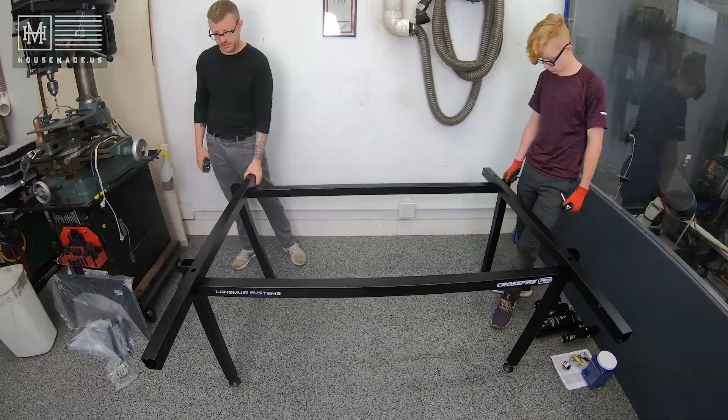Today is the day. We have spent the last couple of days assembling and figuring out all the wiring and everything for the Langmuir Systems Crossfire Pro. My son Dexter just so happens to be kind of an expert in the whole X, Y, and Z axes thing. He's built numerous 3D printers in his very short life. He is 14 years old.

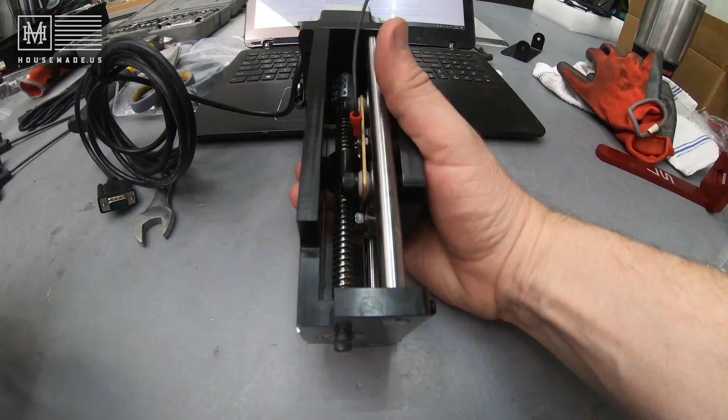And this table is essentially a very large version of a 3D printer. So to have his assistance was pretty awesome, and he knew what he was doing. I kind of went along for the ride and assisted in just double checking everything. So if that gives you any frame of reference, a 14-year-old can, in fact, build a Langmuir Systems Crossfire Pro, which I think is actually kind of cool, right?

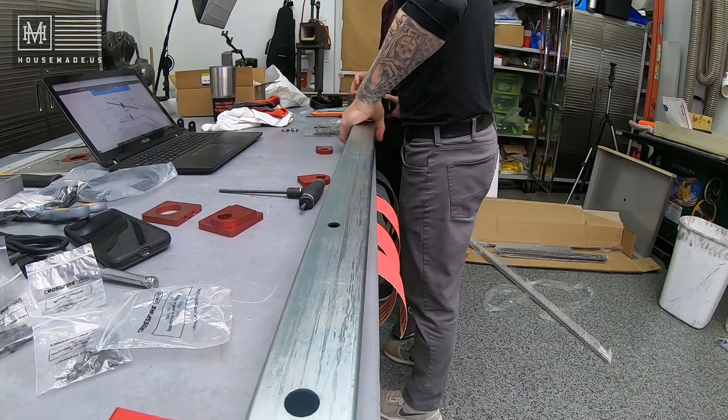Come on up. Did you find that the process was similar to a 3D printer, and did you think it was difficult? I didn't think it was that difficult, and it is very similar to 3D printers, but it's obviously different because it takes away rather than putting it down. But the concepts are the same.

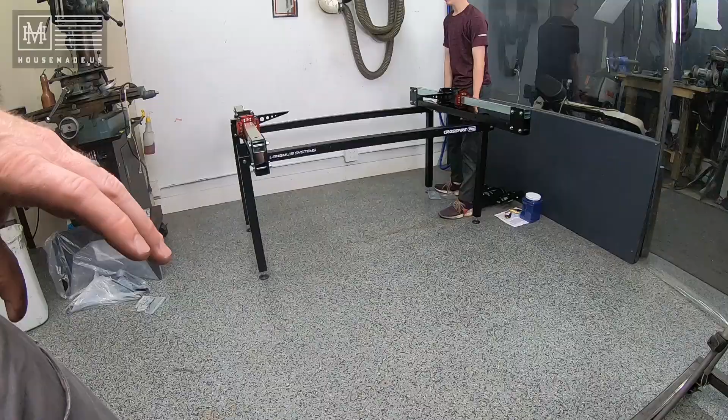With 3D printers, it's usually the bed that moves instead of the whole y-axis. And then the head usually moves the same way as this does, and everything's basically the same. There's obviously some differences between the two.

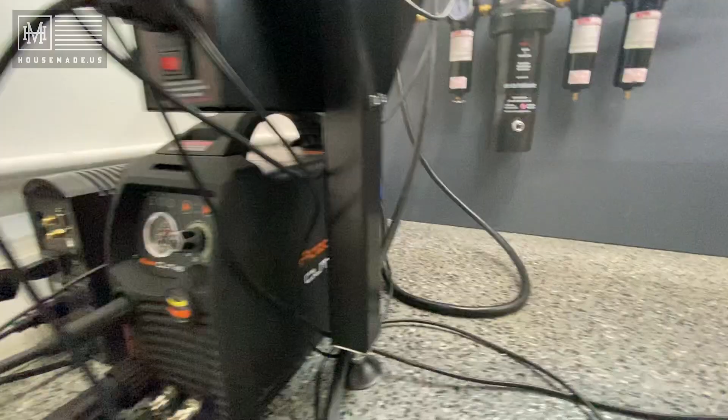Cool. We actually spent all day yesterday getting the plasma cutter plumbed up. There's a couple of core pieces that need to be installed along with the Crossfire Pro and the Razorweld 45, which is the recommended plasma torch setup for this table, although I have seen people use Hypertherm and all different kinds of torches with this setup. We just went with the Razorweld version because that's what Langmuir actually recommends.

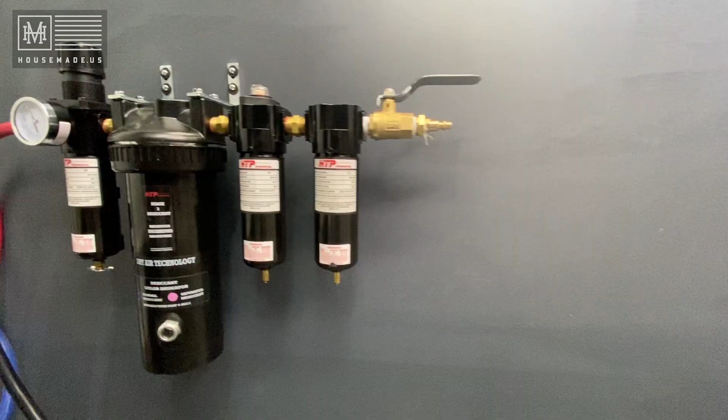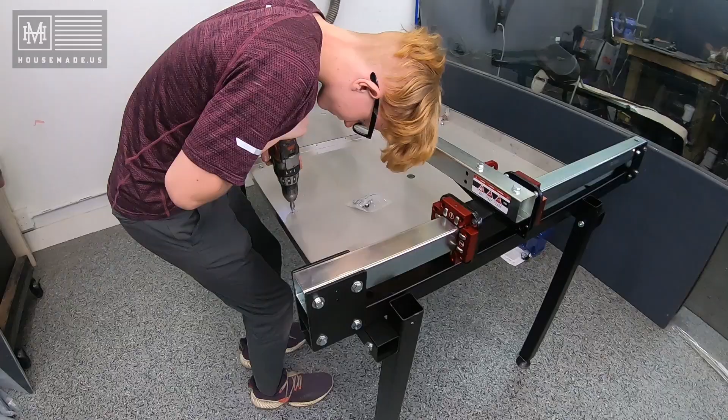So we plumbed it up, and then we plumbed in an inline dryer that went after my dryer that's on the compressor itself. So there's an additional layer of dry air coming into the machine, which many people have told me is super important. If you want good clean cuts, you got to have good dry air. So we spent a little extra money and got the nice air dryer system for it.

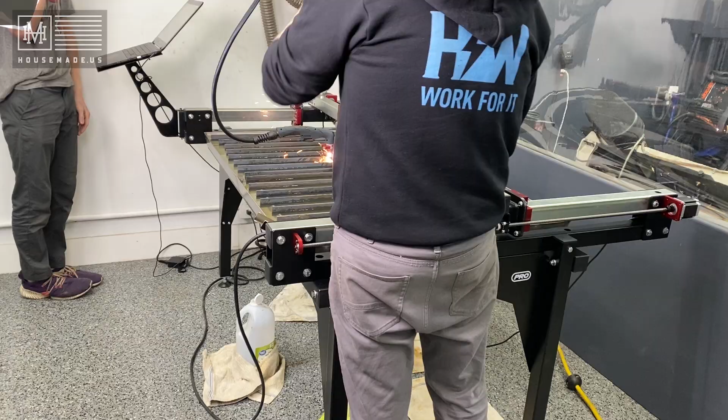So yesterday we plumbed the whole thing, got it all put together and ran our first test cut. It was an exciting test cut because it was something I had been working on in the previous video, which was the platen bracket. I had never put together G-code before, so this was a whole new experience for me. Fusion 360 is awesome, by the way.

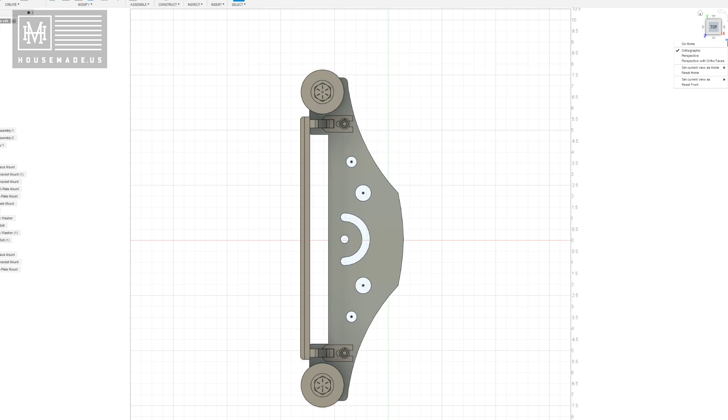It has a whole manufacture component that allows you to draw tool paths and then export it into G-code, which the Crossfire can read through a piece of software called Fire Control. There are all kinds of tutorial videos on the Langmuir Systems website that walk you through this process. Once you understand the core concepts, it becomes relatively simple to set up a path so that it can cut something out.

Then, of course, you've got air pressure and amperage and inches per minute and all these other things you have to factor in. And there's a chart that puts all that together for you, because it's all different based on the thickness of steel you're cutting, or even the type of steel.

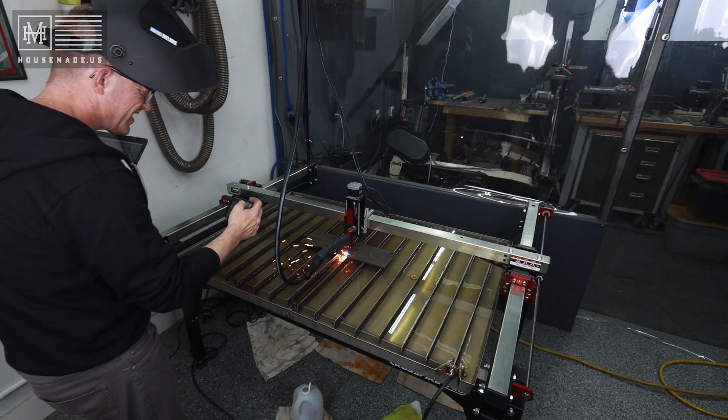So yesterday was our experimental phase. We ran one cut, and I feel like it went really well. It was a good cut, but there were some issues. We didn't have enough air pressure, so there was a lot of slag and dross on the backside, and the pieces didn't fully come away from the cut. We think we have that fixed now, but we haven't run this new set of code yet, so we won't know until we run it.

But I figured, let's bring you guys along for the process so you can actually see it. And I'm not going to edit anything out, so if the cut fails, you'll see that too. So, are you ready to do this? You want to try to cut it? Yeah. You got the machine zeroed out? Yeah. So it's ready, right? Yeah. So take me through the process.

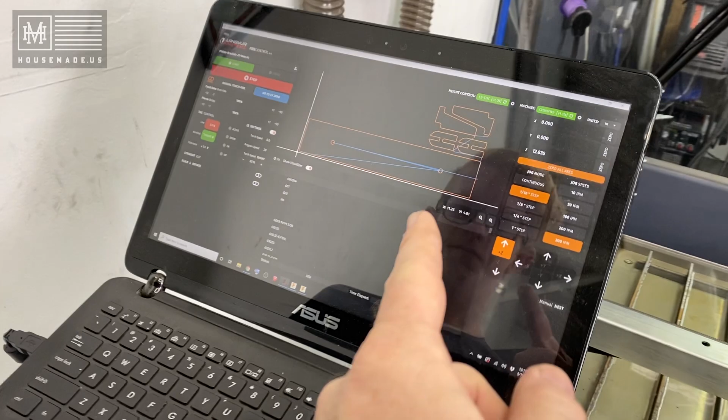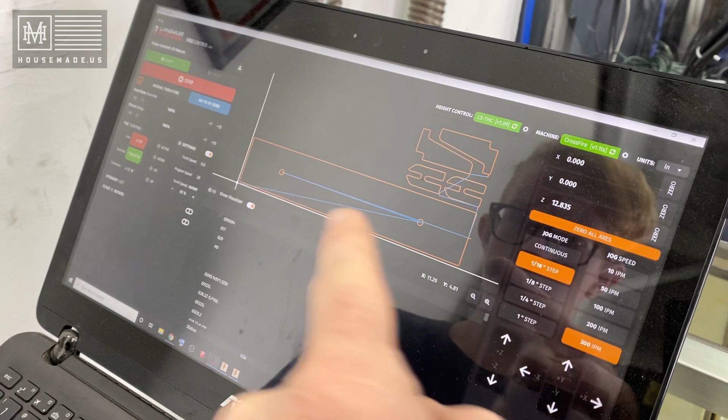Now we've got the G-code pumped into Fire Control, right? Yeah. And these are the tool paths we're looking at here? Yeah, these red or orange lines are where the torch is going to go. And the blue line is where it's not going to cut, right? So that's where it's just traveling across to get to where it needs to go. Yeah.

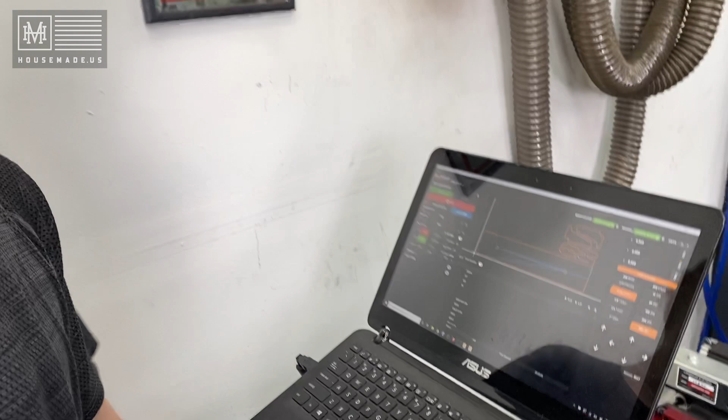Okay, and we've got everything zeroed out. Looks like Z is not zeroed. There you go. Is it all the way up? Mm-hmm. Okay, good deal. So, all right, I guess this is it. We hit start and it'll start cutting. You feel confident? You got all your settings correct? Hopefully. Check your amperage. Check your air pressure.

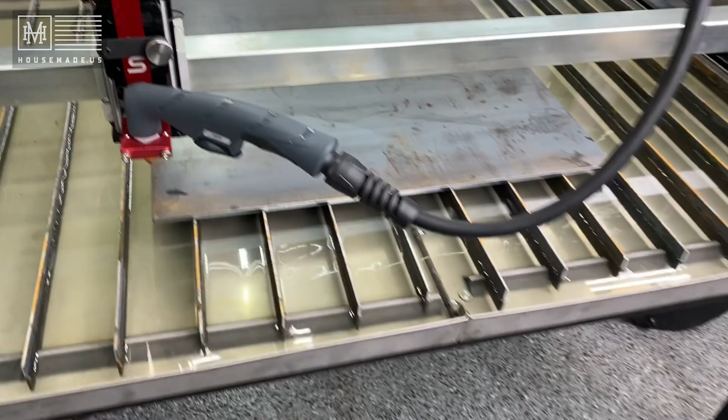We're at about 55 PSI and we're at 30 amps. And it looks like we're all set there. The water table is leak free today. We had to drain it yesterday because we had a small leak. So, all right, let's do it.

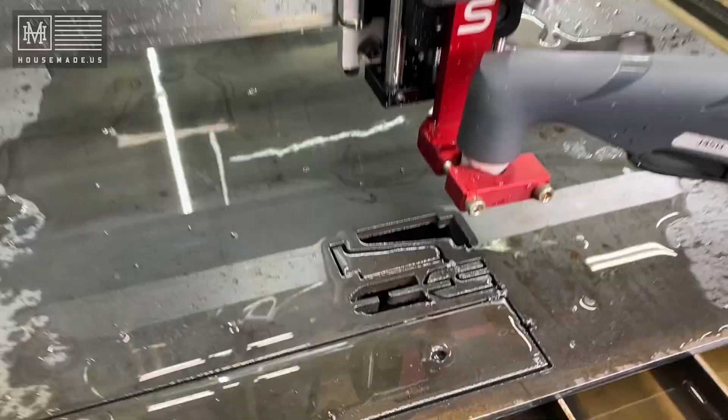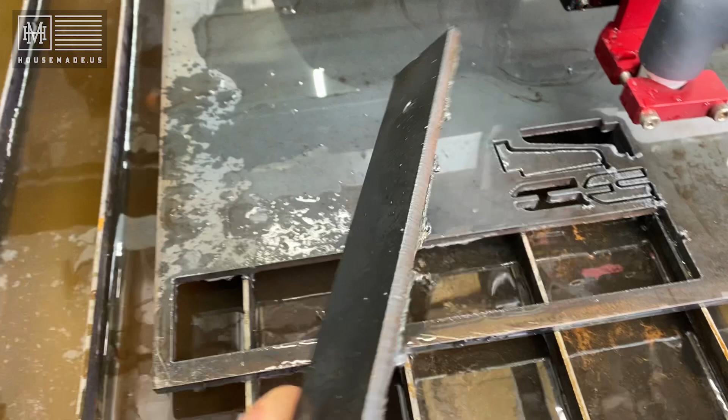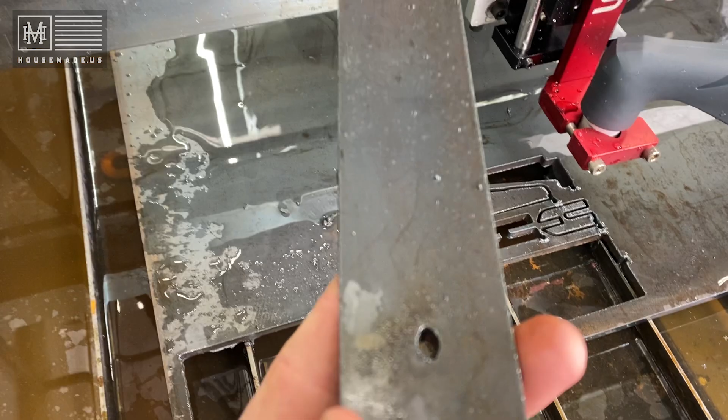Little bit of slag on the back end. It's a lot better though. A lot better. This one piece is all kind of crooked in there a little bit. This one looked like it cut okay. Yeah. Not too bad though. These are really small holes too. So this is a pretty small part.

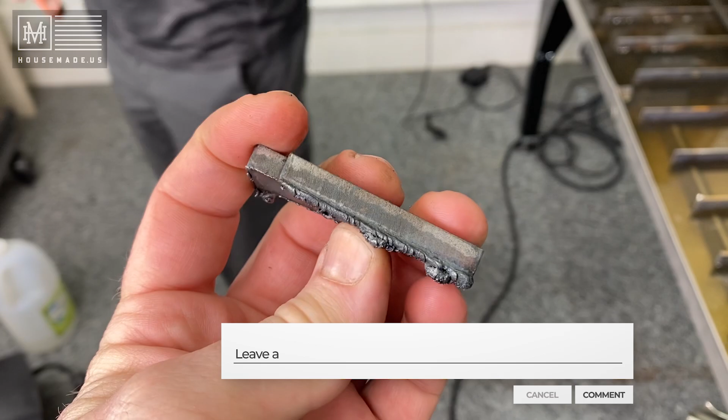The cuts are pretty clean, but it's leaving a little bit of slag or dross. I'm not exactly sure what you call that on the backside there, so we need to figure out why that's occurring. Most of it seems to chip right off. It just kind of comes off in a chunk, but this one would be, that's trouble. We need to fix that.

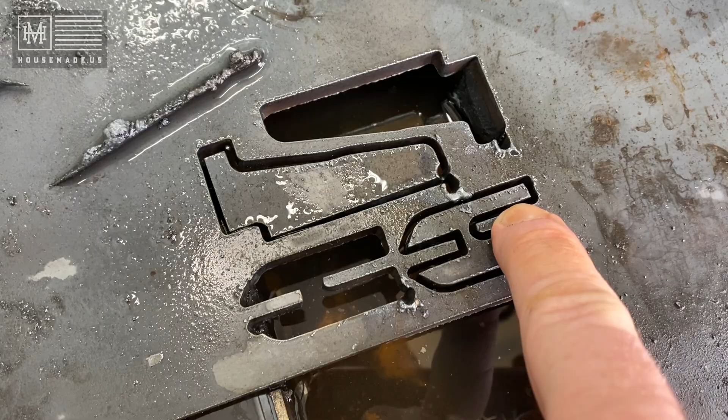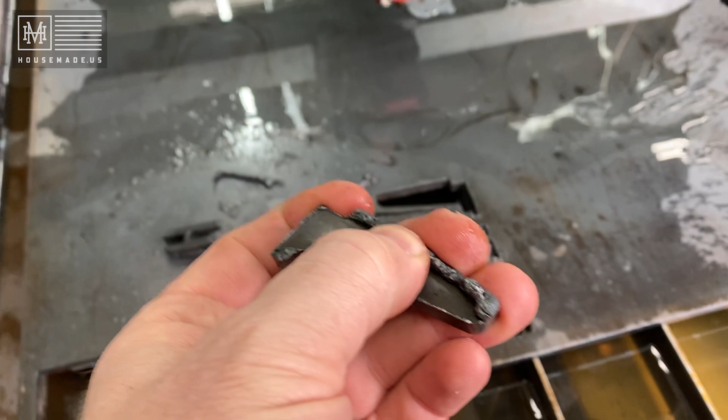And then this little guy here, it's kind of hard to see, but it's off. This side, it looks like it compensated just a little too much on the one side. It's supposed to be the same width, and that could be part of my cutting issue there. And then another slight imperfection here. We kind of have to play around with it a little bit to see what's happening there, but overall not too bad. I'm gonna clean these up and see if they fit together.

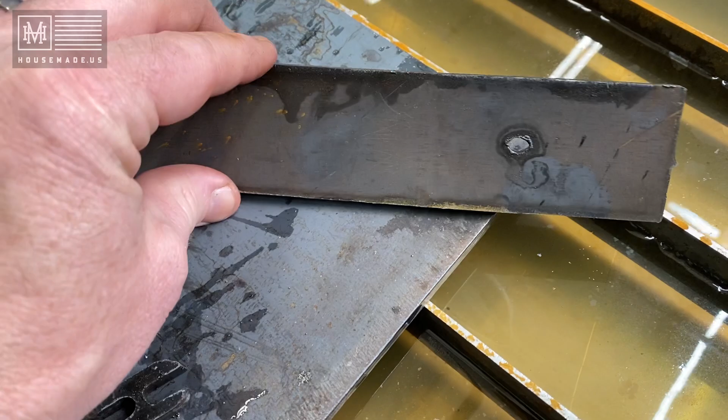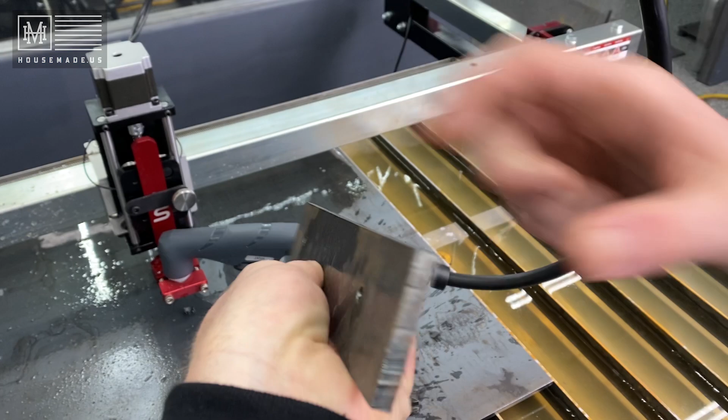Okay, so I tapped it with a hammer, and this actually is what it looks like after I just broke that off with a hammer, and that's actually pretty acceptable in my opinion. I gotta read up on why. Did you break it all off of that piece? Yeah. Oh yeah. So we need to figure out why the cuts aren't square. I mean, they look pretty straight, right? Not terrible. Maybe you'll have to drill out these holes, but yeah, those holes are really small. They're 0.3. Not too terrible.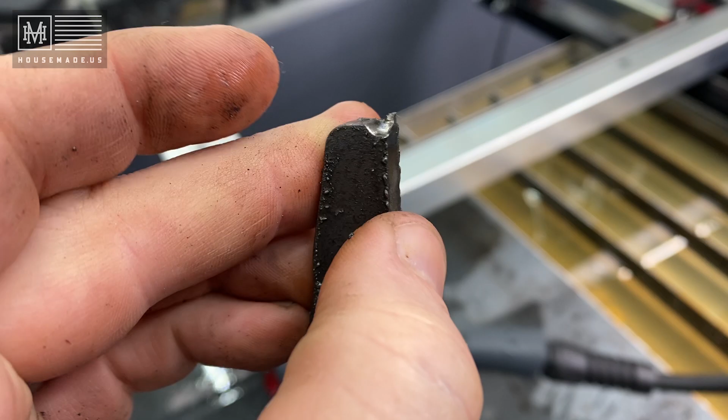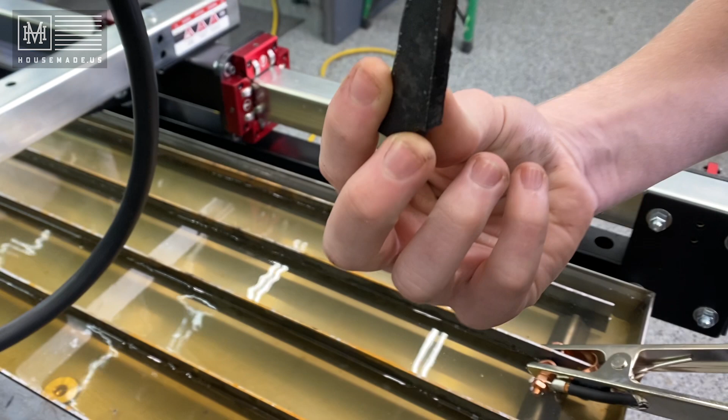But yeah, these little pieces of slag, they just knock right off with a hammer. You can just, there it goes. Comes right off. Clean up on the belt grinder and away we go.

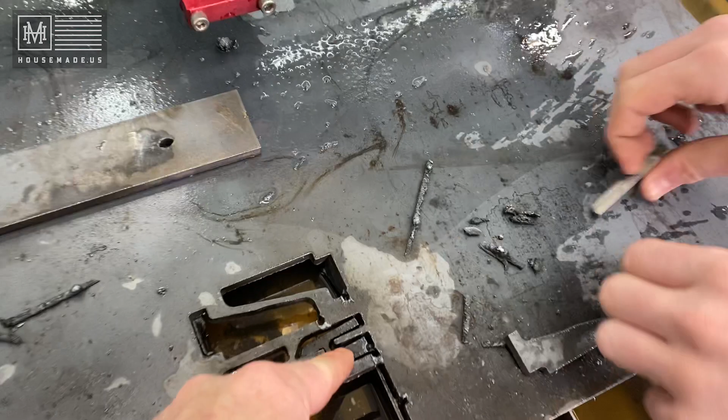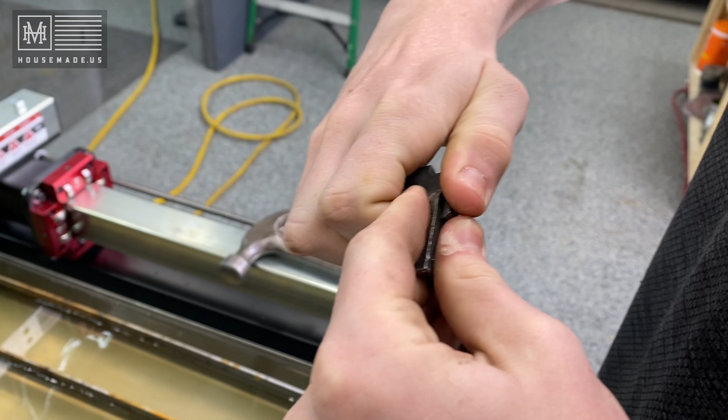Yeah. Let's see if we can assemble these pieces. I don't know if that one's usable, honestly. It might be. Look at that. Pretty close. Oh, there you go. Oh man, it's just like the drawing. Slide it in there. This needs a little cleanup. Yeah. Let's see. Looks really good. Yeah. Let's clean them up, see what we can do.

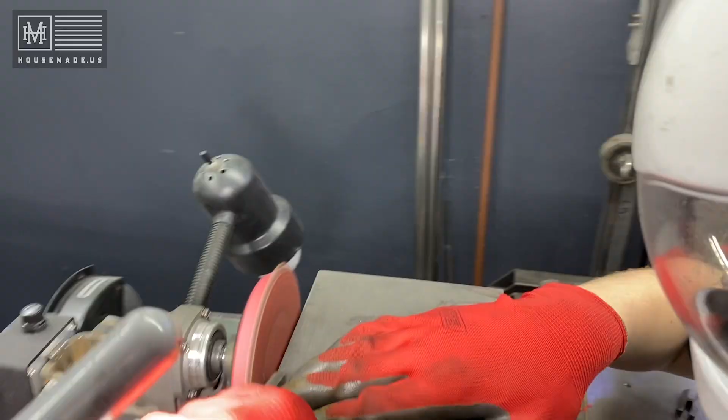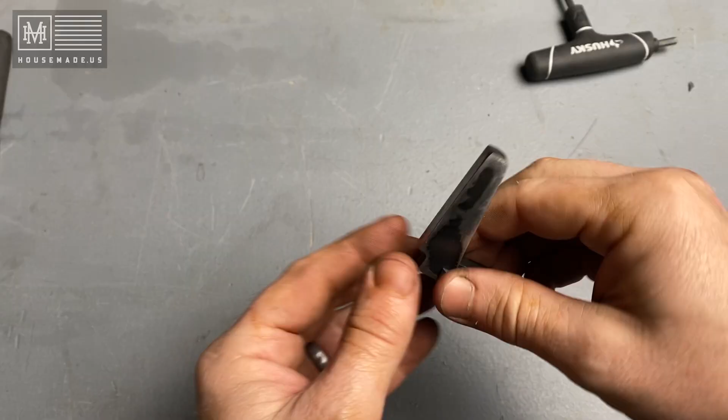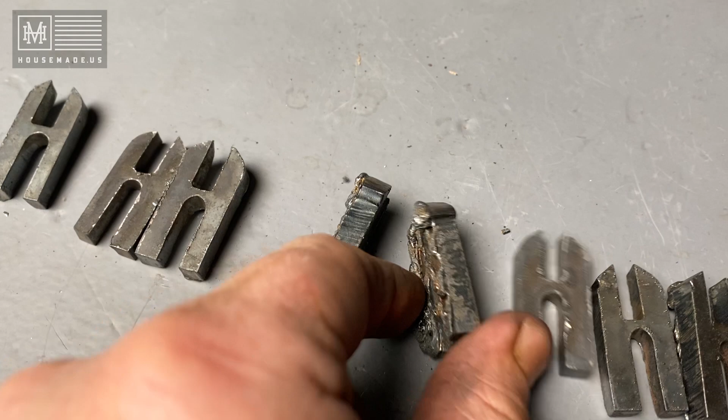All right, so we spent the better part of the day working on these pieces here, trying to figure them out. There's a whole bunch of them that we cut out that weren't right, and what I've learned about this plasma table, probably every plasma table, is that you need to have the table level. And of course, there's other settings like inches per minute and how much amperage you're pumping into it and how thick the steel is and yada, yada, yada.

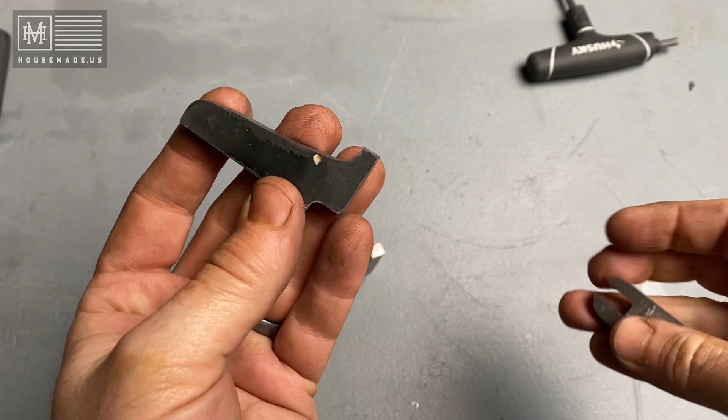But ultimately, this is right off the table. This piece over here has been cleaned up, but this one here is right off the table. Just knocked the slag, or the dross, off the bottom of it, and I feel like that's a pretty good tight fit for a plasma cutter there. And the cool thing about this now is I feel like I'm getting more comfortable understanding G-code and how Fusion works. And these are the other pieces that we cut, and we cleaned them up a little bit with a grinder, and just wanted to file out some of the little corner in here. And yeah, the fit is really nice.

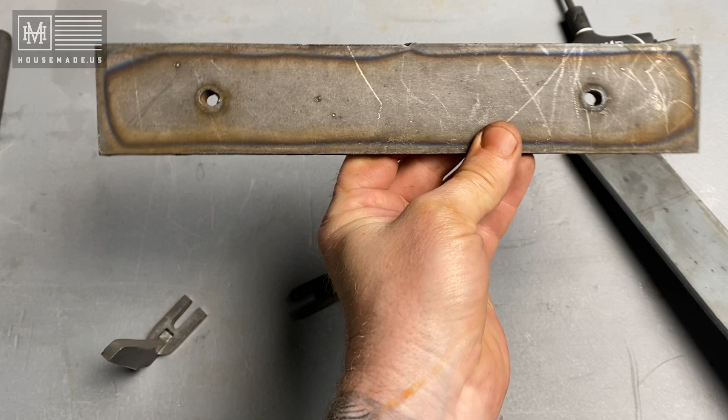Looks really good. The one issue I am having is these are the platen backers. The holes are sloppy, and I think there's not a whole lot I can do about that. I don't believe this size of hole is something a plasma cutter can really do. Could I live with that? Yeah, but this would be better cut on a laser cutter, or you cut the piece without the holes in it and drill the holes in it.

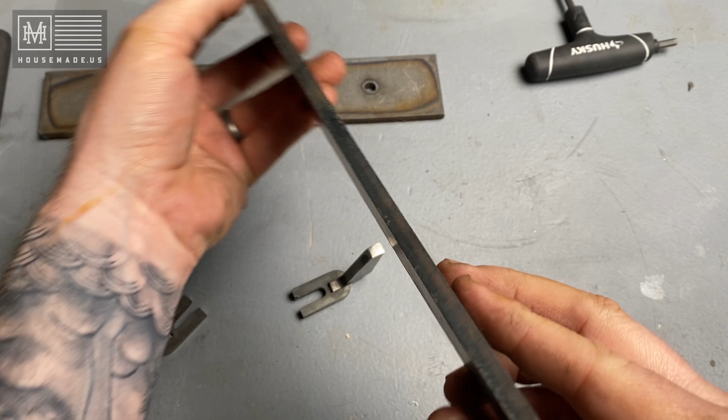Now this was the last piece we cut, and you can see here that is a very clean looking cut. Very little slag. There was just a little bit I had to knock off with a hammer, and that looks really good. But it is slightly too small.

I don't know how, but the plasma cutter is compensating in some way, and this piece is supposed to be 2 inches by 11 inches, and it's actually 1 7/8 by 10 and 15/16. And for you metric folks, try to wrap your mind around those fractions. It's not easy on our end as well, but for most of us Yanks, we understand it pretty well.

But anyhow, the concept that this is just a little bit too small doesn't bother me, because this is literally a backer plate. It doesn't need to be quite that big. It just annoys me that I cannot get it perfect. I wish I could get it perfect, and I'll have to adjust the G-code, play around with my kerfs and so on. But yeah, for the most part, it went really well.

I'm gonna pop a couple of welds here on these pieces, and see if we can actually make this thing into something.

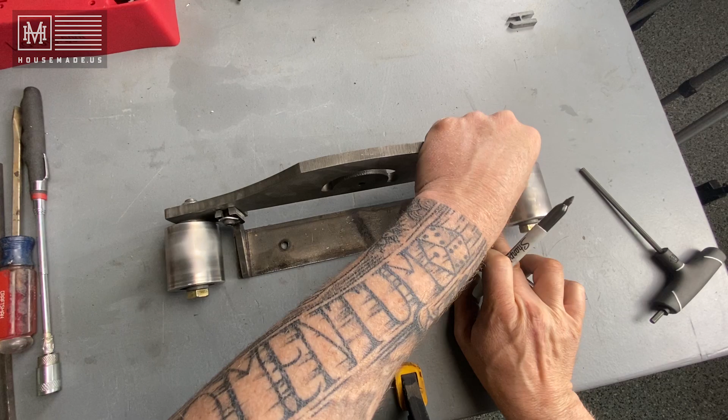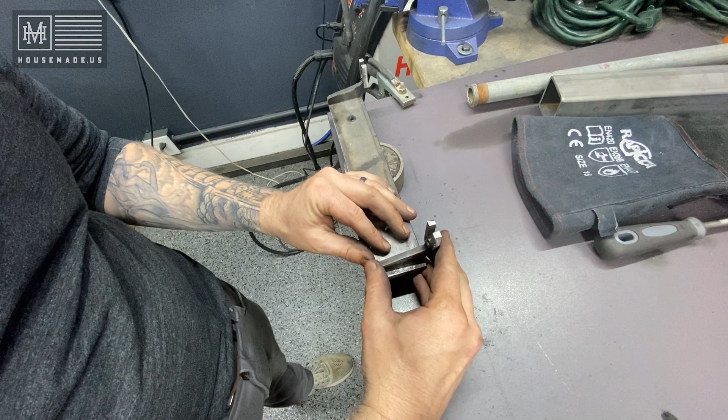Something kind of cool about using a really strong magnet to hold your work pieces. This will also magnetize this piece just slightly, so when you go to set these pieces onto it, they stick. Not that it's perfect, but it's pretty dang close. Just gives you an extra little bit of help when you're doing it.

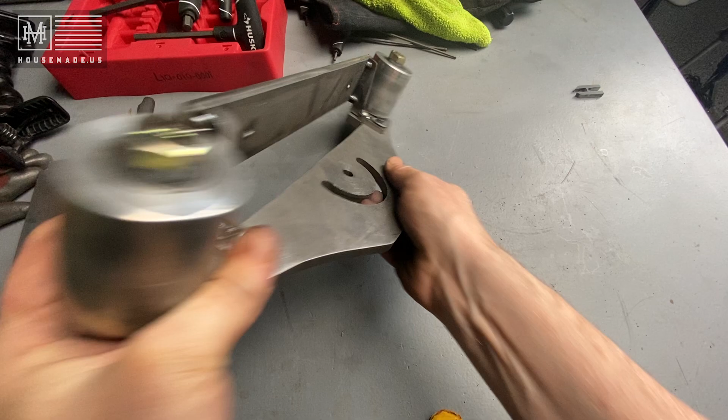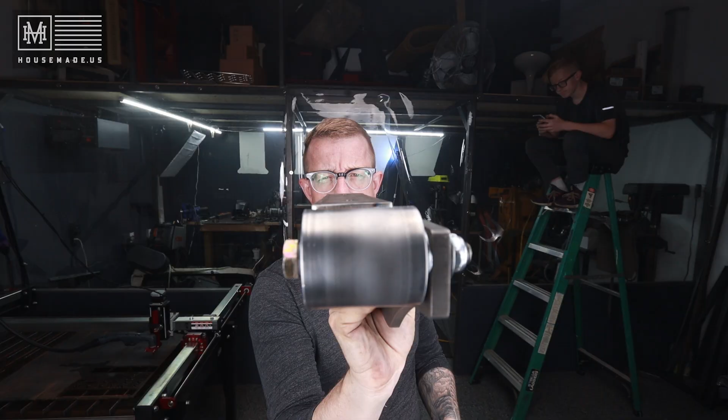Well, all right, so we've managed to achieve what we wanted to achieve. I spent a majority of the day fiddling around with the plasma table, trying to sort out the different alignment issues, and I learned a lot in this process. Spending 8-9 hours on something seems frustrating, but at the very end when you get there, you're slingshotting yourself for future success and also time efficiency. So I felt like it was a necessary evil to level the table, figure out G-code, figure out how Fusion works and kerf works and plasma cutting.

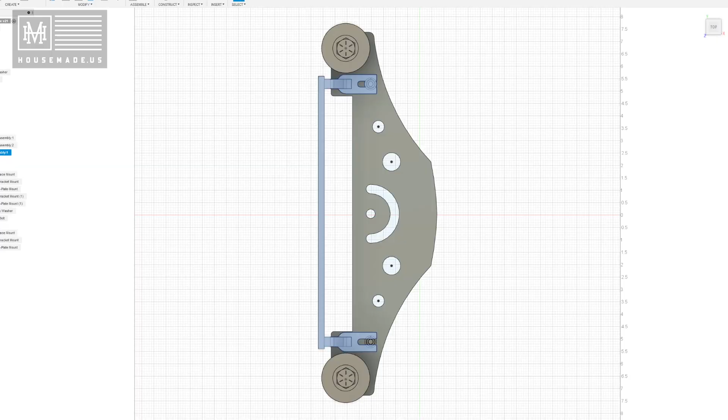And you know what? We made something today, and this is pretty cool, man. To take something, draw it up in Fusion, conceptualize it there, and then see it come to fruition in true cold hard American steel is just a thing to enjoy, man. And it's not perfect, it's got a little bit of a twist in it, just a slight twist.

We can fix that, but for the prototyping concepts, the idea that we can take something, design it, and then send it to a CNC machine and print it is now here. We can now do that. So the possibilities are endless in my mind. This project needs a little bit of refinement, I think. I ended up using all 1/4" steel.

I thought initially that I would use 3/8 steel for these pieces here, the brackets that hold the back plate on. But I think I could do it in 1/4", and especially when I cut this backer plate, I realized this thing ain't moving. It's in there. There's no play in this thing at all.

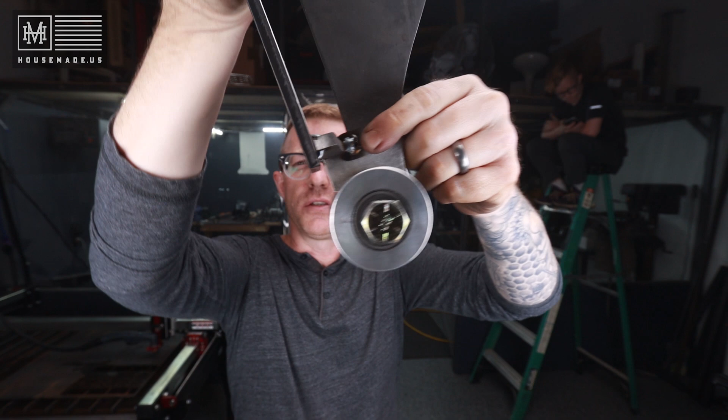Fabrication wise, it went pretty easy, just as I thought it would. It's not a difficult weld together process. Plus the way I designed it, it gave you nice flat surfaces to pop welds onto. As you can see there, I just laid up a couple more welds. And when it wasn't straight, I took a hammer and smacked it and got it back into place. So I feel like, all in all, this is a success. And I am excited for the future and all the things that this brings with it. All the technology that we can now compile our ideas and pump out new and cool stuff.